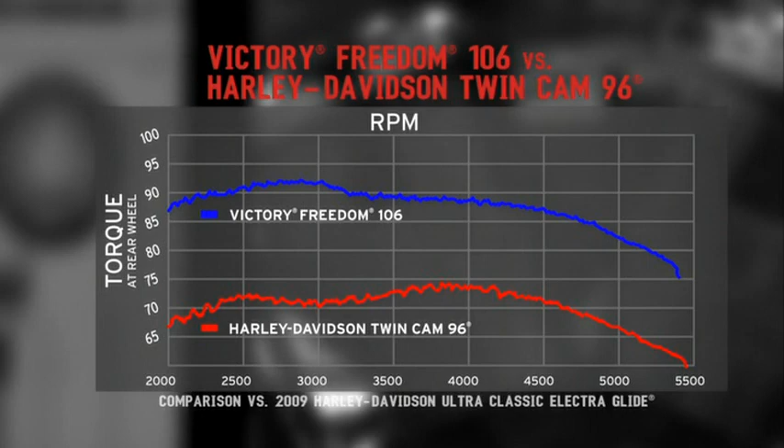These are rear-wheel performance curves recorded on our dyno here in Wyoming. Most large V-twin engines are able to provide high torque just off idle, but the competitor's torque curve dives sharply after that initial peak value, whereas with the Freedom engine, it continues strong throughout the mid-range and keeps going into the higher RPM range.

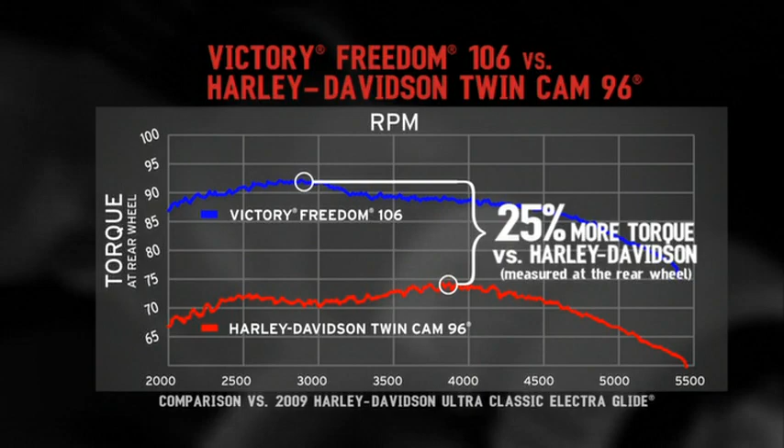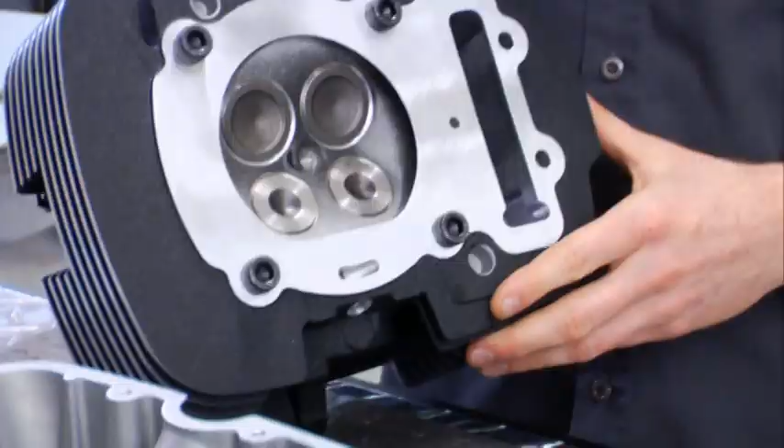To make more power, you've got to pack more air into the cylinder, and the four-valve design helps us do that in a couple of ways. Using two intake valves instead of one, we're better able to package the total valve area required to flow enough air to maintain this torque curve at high RPM.

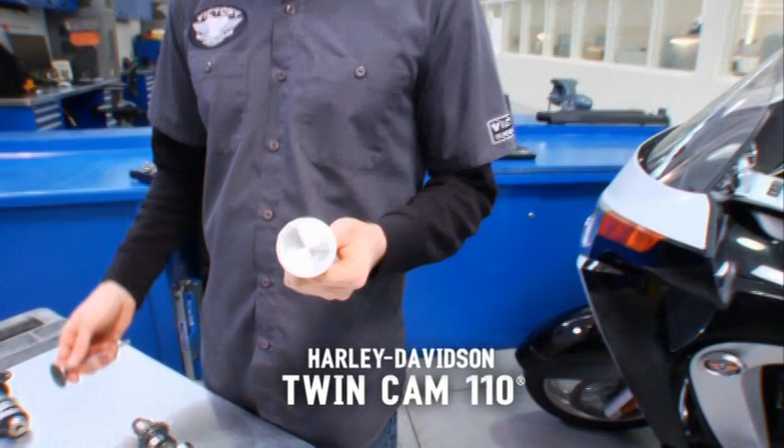To get more air into the engine, it's generally helpful to open and close the valves as fast as possible, which is harder to do with a heavier valve. This is an intake valve from a competitor's two-valve engine design compared to the intake from the V106. You can see it's clearly a lot heavier. Notice the very heavy multiple coil spring required to keep this valve under control, whereas the 106 only requires a single, much lighter coil spring.

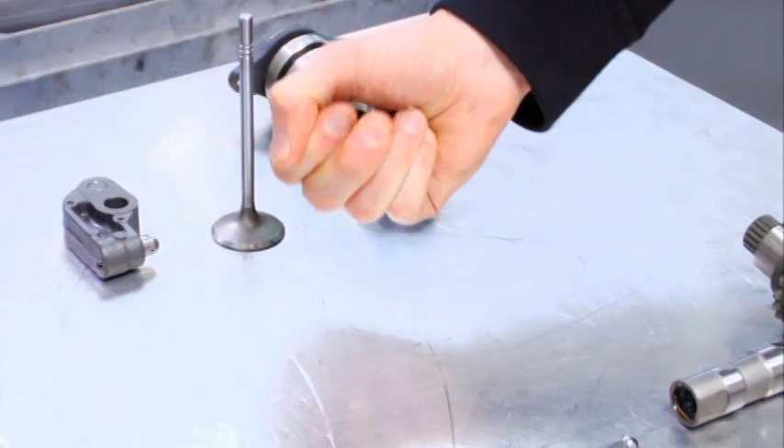Here we have three separate sets of components, two from competitors and one from the V106. You can see these are pushrod style competitors, also large V-twins. In one case, we have not only the heavy intake valve, but the mass of a heavy translating lifter, a pushrod, and a heavy steel rocker arm.

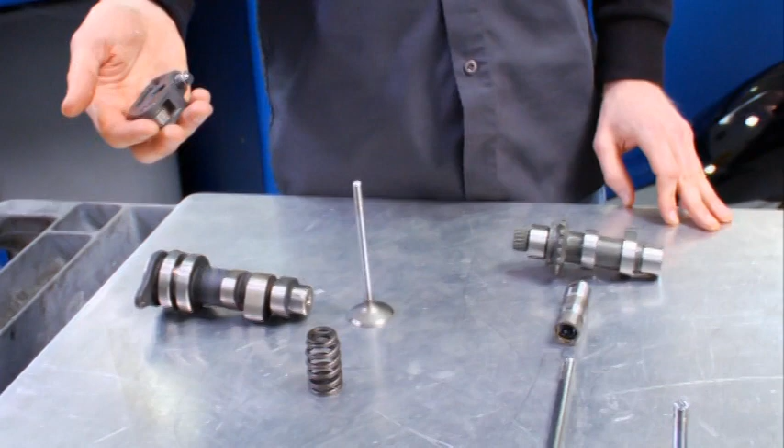By contrast, the only parts connecting the valve to the camshaft in the V106 engine is a lightweight cast aluminum rocker arm. Lightweight components with a stiff structure allow us to maintain good dynamic control, open the valve quickly, close it quickly, and produce this broad, flat torque curve that's so usable to the touring rider.

The engine's airbox also doubles as the vehicle frame. Sharing this duty allows us to have a large airbox volume, in this case 11 liters, which helps reduce intake restriction and eliminate peakiness of the torque curve.

Engine cooling requirements generally increase with maximum power, and we find that in our power class, adding a water cooling system with a radiator just isn't necessary. So why do it? You end up with a large, heavy part, hoses cluttering everything up, and increased maintenance requirements. So we've gone with an air and oil cooling scheme.

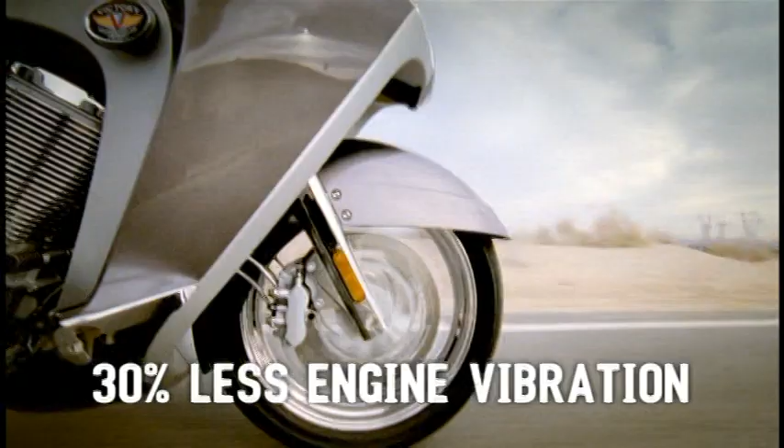Carrying the power from the V106 engine to the rear wheel is our six-speed transmission. We took our original five-speed transmission and simply added a gear ratio to allow you to drop engine RPM at cruise. For example, at 70 miles an hour, shifting from fifth into sixth gear drops RPM by about 500. You actually get a reduction in inertial engine vibration of 30%.

I don't know if he wanted to show this or not. Right, that's me. All the engineers and technicians who worked on the project have our initials molded into the back of this body panel. We all signed it.